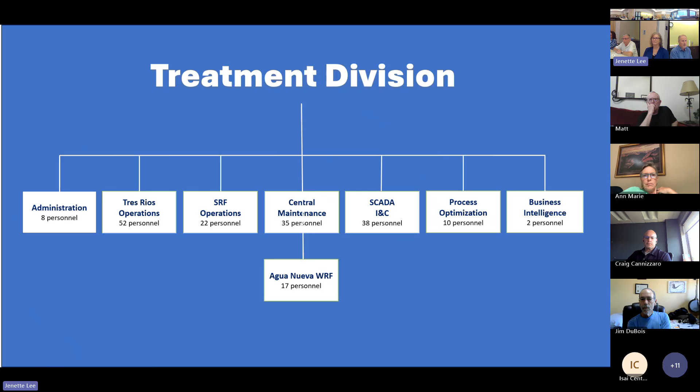And then Belinda runs our business intelligence team, and they try to make sense of all the data we have. What Belinda's been doing right now is gathering Power BI dashboards, bringing in financial aspects, our personnel aspects, laboratory data, just trying to make better dashboards and use our information. Then we have Agua Nueva next door, which is actually operated and maintained by Jacobs under contract. That's a 15-year contract. Next slide.

So when you think of wastewater treatment and resource recovery, we primarily make 3 main products. Reuse water that we put back into the environment, whether it's for habitat restoration or beneficial reuse for other applications. Our biosolids, the solids that we produce, go out for land application as a fertilizer amendment. And more recently, we've been making renewable natural gas since about 2021. Prior to that, we used all of our biogas for heating needs on site, or cogen in previous years when it was Ina Road, but now we're putting all of our gas into the natural gas pipeline.

Thanks. So projects that are underway at treatment division. This is our Avra Valley facility. Biggest improvements we have underway, and Jackson just mentioned it, we did a disinfection upgrade. The UV disinfection system, we replaced all of it. It had been installed probably 16 years ago. It did undergo some damage in a flood we had a few years back in a summertime event, and so we started having more malfunctions on that system. So we upgraded the disinfection system with more modern equipment just recently. I think they were finished probably about a month ago.

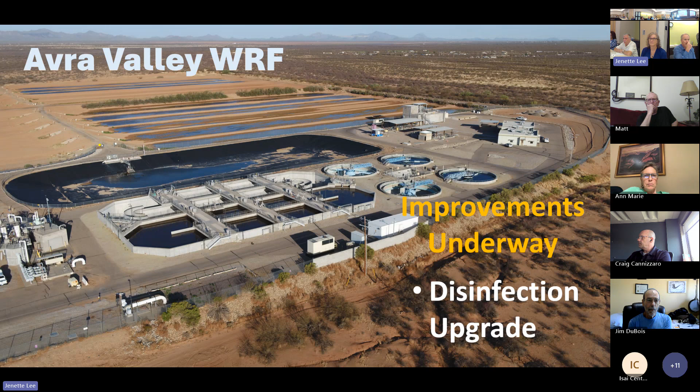Next slide. Yeah, and go back. Here's one important thing about Avra Valley. You'll see there's 3 bridges going across those 2 oxidation ditches. We have 6 rotors on each ditch here, so we can provide a lot of energy, a lot of aeration capacity. When I get to the Green Valley slide, you'll see it doesn't have that, in a project we have underway. Next slide.

Our Corona de Tucson project. This one's kind of interesting. So we've had this facility way out past the fairgrounds, Corona de Tucson. We have two reactors out there, one MGD total, so each of them's half an MGD. We've been running on one ever since it was installed.

Our flows increased to the point where we need to have both of them in service. So we just switched over, I think it was January of this year, we have both basins in service. And in doing so, we quickly realized we were lacking the aeration capacity to run two reliably. The header that supplies the air to both those reactors is compromised, just cathodic corrosion in the soil. We have leaks in that pipe, so we need to replace that.

We're running 5 of the 7 blowers, and so we need additional blower capacity. And the chlorine contact chamber we had out there was only rated for 500,000 gallons. And so we need to upgrade the disinfection to 1 MGD as well.

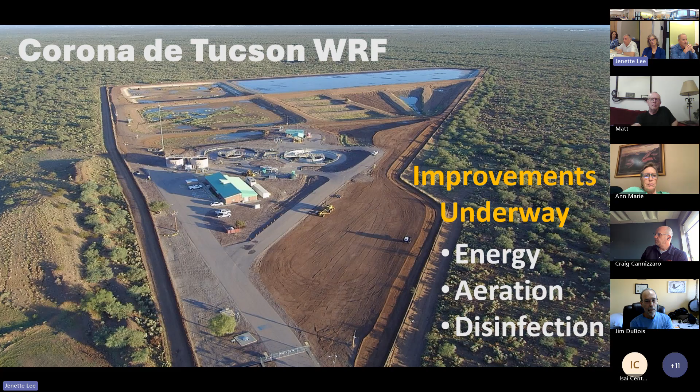Green Valley. Green Valley is kind of in a precarious situation because we're thinking of closing it and building that regional facility in Sahuarita. So what do you do in a facility like this? You don't want to invest a lot of money that's going to be abandoned in a few years, but it's a very nice facility that served us well. The difference you see in Green Valley, across that oxidation ditch on the left, you only see 2 bridges there. We only have 4 rotors there. So we're somewhat air limited.

This is a 2 MGD ditch, but we've gotten permit capacity that we can hydraulically treat 2.8 through that ditch. And we need a little bit of additional aeration. So our process optimization group and the operations team out of Green Valley have been working for the last 2 years where we would take flow from those 2 round aerated lagoons on the right and shunt that water back over to the ditch during low flow conditions, kind of shed flow, just like we would do a swing zone in a traditional BNR operation. And it's worked quite effectively.

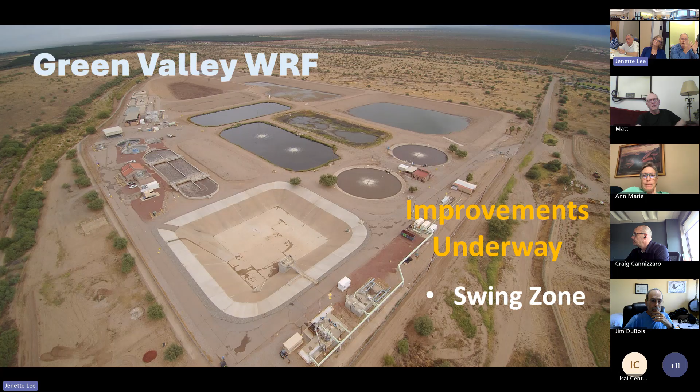Our big challenge right now is getting ADEQ to see it that way and not have to make major changes. What we'd like to do is be less dependent on the lagoon system, use those aerated lagoons as a pre-treatment to provide some energy and air, then move that water over to the ditch. We produce Class A plus effluent from the ditch. We'd like to maximize that, but we're going through ADEQ's red tape. Our goal would be to extend this facility to the 2030 time period until we can get this regional Sahuarita plant online. Next slide.

So Jackson mentioned it, but this is just a snapshot. Ideally, this is the location of what we call the Southwest Regional Facility right now.

We are searching for new names for the facility, but I'm afraid to do a competition because, remember that research vessel the Brits put out a few years ago? The number 1 internet vote was Boaty McBoatface. We don't want that, so we need to be careful how we name this facility.

But eventually it could receive flows from Arivaca, Green Valley, and the town of Sahuarita, all those regional facilities.

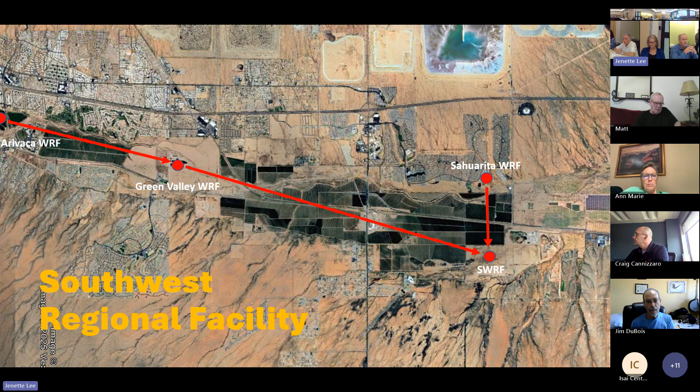It's a huge expense when we change out that carbon, and we're right adjacent to a sports park and right along I-10 and Ina Road. And so at our Agua Nueva facility next door here, we use a different media. It's a biofilter, BioRem, and it has an irrigation system. It keeps the media moist. As the air goes through it, the bacteria that grow in that biofilter consume sulfur. And so they knock down that H2S odor.

And so this is kind of a hybrid system. We like the performance of the one next door. It's performed very well for almost 12 years without any difficulty. So we installed the same thing here at Tres Rios. That'll lessen our dependence on carbon change out. It's going to improve the air quality. Our neighbors right next door, the sports park, they're right along the fence line, right at our headworks, the most odoriferous part of the plant, and we don't get complaints.

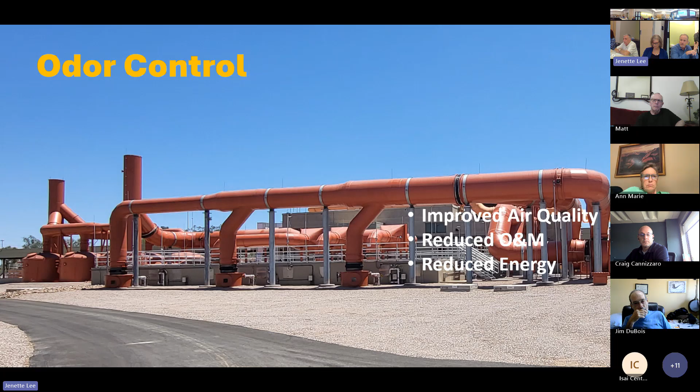And then we do still maintain a few carbon vessels on the back end just for polishing. And so this is a real nice addition that we put there, but it's going to save us O&M cost for media replacement and energy. Next slide.

Environmental stewardship. So this is the project that we've been working on, and some of you that have been on this committee for a while, you remember that we had the Anammox pilot project here for about 4 years in the back. Alejandra helped me construct it when she was an intern with me. We ran that for about 4 years. We're constructing a full-scale one at Tres Rios right now. And you'll see we're building columns within an existing tank. We repurposed an old clarifier at Tres Rios. We're building a tank inside there, and this will reduce the ammonia level in our side stream waste.

That side stream waste at Tres Rios, because we have regional solids handling, almost 40% of our daily ammonia load is from our own side stream recycle waste. And so this process right there will take that ammonia from like 1,200 parts per million down to less than 200 parts per million, using about 30% less aeration. And so the benefit of that is we'll be able to have fewer basins in service at Tres Rios, and we'll save at least 30% on our aeration demand, which is energy cost. And we'll get higher water quality.

One thing that we're challenged with at Tres Rios is we have an ammonia impact ratio in our permit, and that ammonia ratio is based on temperature and pH. Can't do much about the pH, but our temperatures are quite high, especially in summer. So at Tres Rios in the winter time, our ammonia discharge limit's probably around 4 parts per million. In the summertime, it's less than 1. So it gets very challenging in the summertime to meet that ammonia limit. So getting rid of that 40% of our ammonia load with this process will help us achieve higher quality water as well. Permit compliance. Next slide.

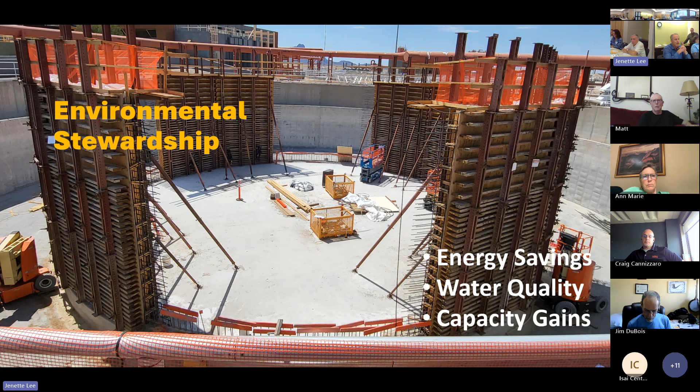So rehab. We have 6 digesters at Tres Rios right now. These 2 large ones right here were put in 2013. There's 4 that were installed back in the 80s. We're in the process of adding a 7th digester right now, and we're doing rehab on some of that original 4-pack right now. Digester 4, we just removed the cover on it last week, and we're doing a rehab on that. We'll get a new cover on there.

The covers also float, so that's where we store biogas before we take it to upgrading to RNG. One neat process that we're going to install there right now is an alkaline thermal hydrolysis process. And Steve and I went and toured one in Kenosha last year, I believe.

The benefit of this, you preheat the waste activated sludge before it goes in the digester, so it lyses the cells. So we get improved biogas production. It reduces the volume, so it reduces your sludge volume by about 50%. So by putting this process in, it's going to lessen our need to construct future digesters because we'll have more capacity, make better use of our existing capacity.

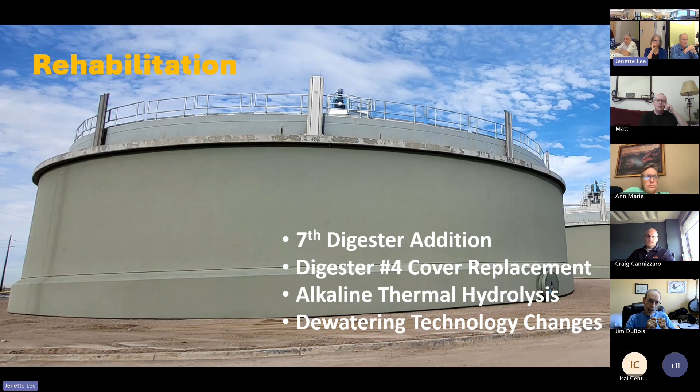We're also looking to change out from our centrifuges to screw presses, strictly because of the high dollar demand and high lead times to get our centrifuges repaired. Very expensive, very long lead times, and it's kind of become a bottleneck for us. And so we're putting in screw presses instead. Next slide.

We don't always have sunny days. Sometimes we have a bad day. We were in the process of doing some upgrades on our RNG process in late June. And so we were doing an inert gas purge, and you'll see this header right here that's broken in two. It ruptured in one of our digester control buildings. Luckily, it ruptured when we had inert gas nitrogen through there, not when we were flowing biogas. It could have been an explosive hazard.

But the most alarming aspect of this is this was engineered and designed and put in place in 2013. This component that failed right there has a PSI rating of 5 PSI. It was engineered and designed for a system that operates at 15 PSI. So it was a liability, a ticking time bomb waiting for an opportunity. Luckily for us, it happened during an inert gas purge. Nobody was injured. Damage was limited. This could have been catastrophic.

So we haven't brought our RNG process back up online. It'll be down for almost 3 months because we're doing a complete thorough safety review, process hazard analysis. Because that original 4-pack of digesters were installed in the 80s, a lot of these are over 40 years old now. So we're doing a really thorough review, making sure that stuff that was installed is appropriate for the current uses that we're doing today, and that there's no other hidden skeletons out there that aren't fit for purpose. So we're doing that to make sure all our assets and our employees are safe before we resume biogas production for RNG.

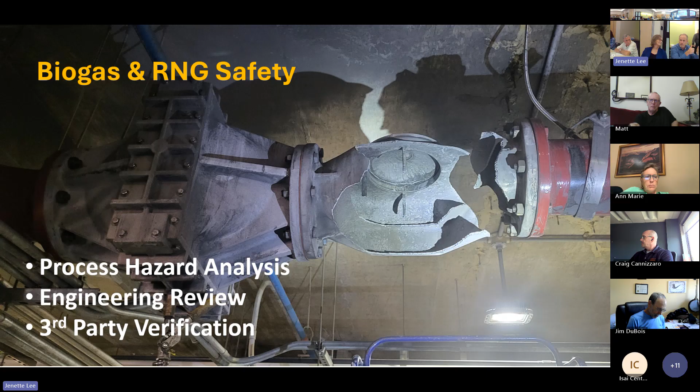And we're having M3 Engineering in town doing the third-party review, pressure testing all these systems, but we're doing a component review of all these things over the last 40 years, and Brown and Caldwell's helping us do that effort as well. So that'll be a future project, things that come out of this. We've prepared that already. We haven't brought the system back online yet, but we're gonna do it the right way and make sure that when we walk away, Jackson and I and Steve and everybody else, that for the next 40 years, people are assured that it's safe and it's not a liability for the department.

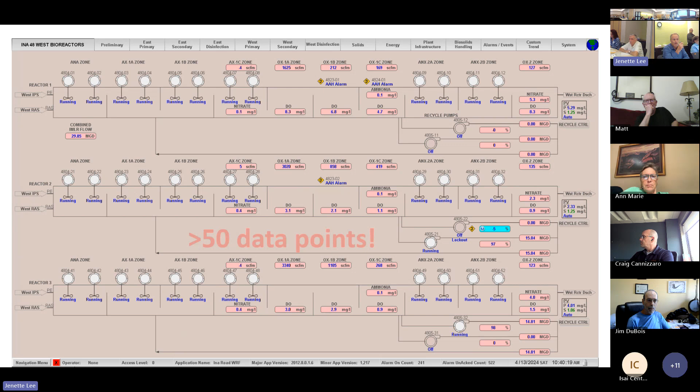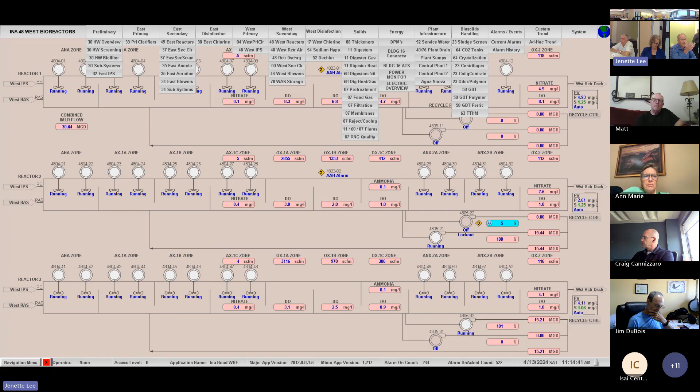Now that SCADA is reading everything, every few seconds you're getting a data point out of there. Combine that with our laboratory data, all the power meters and different things we have on site, all those sensors. We have thousands, hundreds of thousands of data points being generated every day. But it's useless information because nobody's got the time or ability to look through that data.

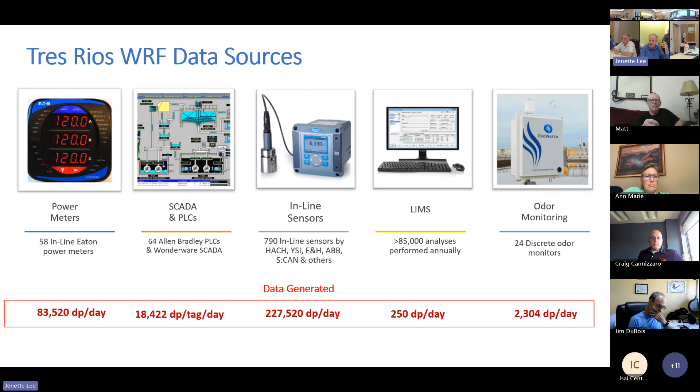So we're data rich, but we're information poor, right? And so this is what we feel like sometimes. You have all this information coming at you, but you really can't use it effectively. So what our solution is, we've all seen AI, ChatGPT, and how it's being used in different fields. We partnered with Palantir. They're the largest AI firm in the world.

They mostly do government contracting and military work and banking systems, but they have a product called Foundry, and it's used in manufacturing, whether you're Caterpillar, John Deere, Ford. It's used on assembly lines, stuff like that. And so they've adapted it for the factory. We're a water factory, right? And so we're adapting it for our use, and it consumes data, all those hundreds of thousands of data points, and it makes recommendations. And so Belinda's leading this project for us right now.

We've had it in operation at Agua Nueva for about 3 years now on the energy side. In Delaware, we've been using it for disinfection. And then in Puerto Rico, they've been using it for preventative maintenance. And so the packages that we have here that we're implementing, we did a blue ribbon panel last year with firms from WSSC Water in Maryland, Denver Water, Raleigh Water, and ourselves. And we went through 2 days looking at what's the best implementation for Tres Rios.

And so we'll be implementing it for polymer chemical savings, disinfection savings and improvements, and energy savings. And Belinda will be leading that project with us right now, and we're just kicking it off this month. Next slide.

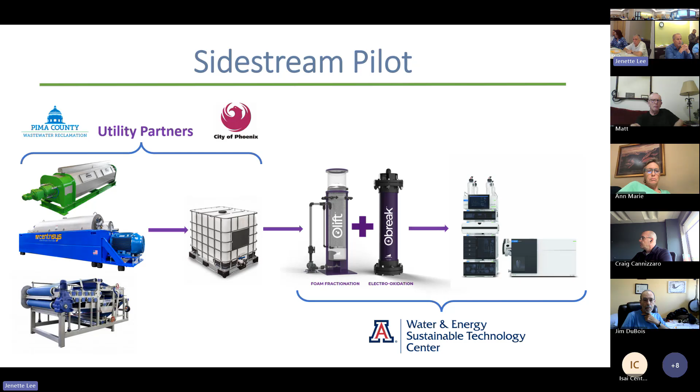And so they've done some work for brine reject using this foam fractionation, and it looks very effective. So it's another opportunity for us. Next slide. And that's it. Is that exciting? Yeah. Okay. Yeah. Thanks.

What is the actual term for this foam side stream? Has it got a name? Foam fractionation. Foam fractionation. Okay. So you're taking the PFAS out of the liquid fraction into the foam fraction. And then you've got a ton of foam, you pull a little vacuum on it, the foam collapses. Then you can either evaporate it and dry it, dispose of it as very small solid waste, it's concentrated. A lot smaller volume.

If I were to tell somebody about this, what would I call it? We're air stripping PFAS. Air stripping into foam and then fractionating it into the foam and then reducing the foam into the solid. Yeah, so when you're doing drinking water, if you're doing regular well water, it's not gonna foam very well, right? So you have to add a surfactant to it.

And so the longer the PFAS molecule chain is, it's more hydrophobic, right? So it jumps into the foam really easy. You get 96%, 98% extraction efficiency. The shorter chain molecules, they're more hydrophilic. They want to be in water more. But the PFAS molecule's got that little polar head on it, right? And so we're adding cationic surfactants that will attach to that little head and help strip it out of solution as well.

The polymer that we use for dewatered biosolids is a cationic polymer. And it foams whether we want it to or not. So it's kind of a perfect marriage of this stuff. And we met them last year at WEFTEC and we said, have you thought about using this in wastewater? He said, oh, it would never work in wastewater. We'd have to have such a huge system to treat 50 million gallons. I said, oh no, I'm thinking more of the side stream wastewater, it's a concentrated stream. And they said, you're on to something, how can we partner? So they gave us these systems and they just arrived here.

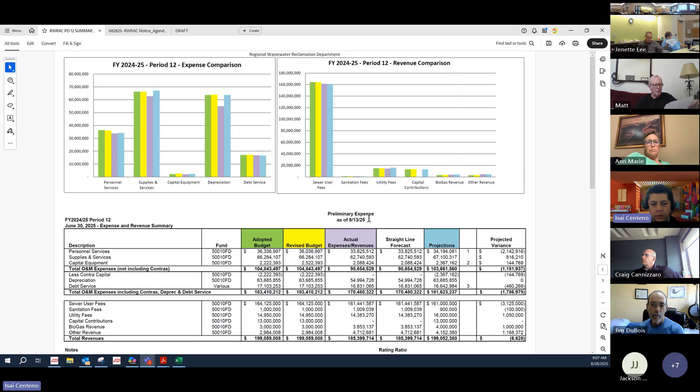So first and foremost, I want to bring the attention to this is a preliminary expense as of 8/13/25. We have to pretty much pick a date to cut off because data keeps coming in because people are working on accruals. So these actual expenses and revenues were changing every day. So we pick the date and hopefully next time we meet, I'll get you more up-to-date information. So as of 8/13/25, this is the data.

Adopted budget is still $104.8 million. Our projection as of period 10 is still 103.66, giving us a projection variance of 1.1, and the actuals at that date are $98.6 million. Scrolling down here to the total O&M expenses, including the contras, depreciation, debt services, our budget 183.4, actuals at 170.4 at that point, and projection of 181.6.

As you can see, our last capital contract has not been processed yet, so there's a lot of things still kind of missing in this process. So that gives us a variance of $1.7 million. Scrolling down to the total revenue, $199 million. Our actuals 185.3, and our projection is 199, giving us a variance of about $6,000.

As well, we can see that the capital contribution is still in process. So with that information still missing, we're still projecting that we're going to be coming under budget. And overall, Wastewater has done a great job using the revenue and total expenses to accomplish all the tasks that it has accomplished. I believe Mr. Matt has his hand up. Matt? Yeah, thanks, Isai. Sure thing.

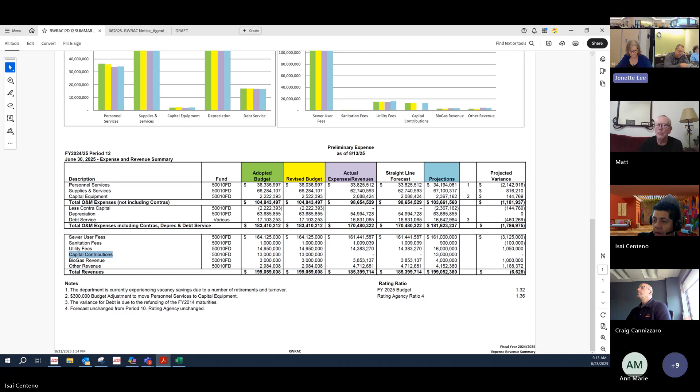Thanks, everyone. We'll move on to item 4, which is the financial subcommittee report. Kirsten? The subcommittee did not meet. Did not meet. We'll take nominations for when we should meet. It's not on the calendar. I believe a Doodle is gonna be sent out in September with proposed dates. Proposed topics too. We had some from last year that we were gonna cover in the fall. Okay. Perfect. Excellent. All right. Thank you very much.

And then the CIP subcommittee report, Asia. I saw you on there. Yes. Oh, hey, good morning, everyone. I apologize. I thought I had my notes here with me from our last CIP meeting, but I do not. Jeanette, can you help me out with the date that we met? July 14. Yes, okay, thank you. We met July 14th and we discussed the longer range, longer term CIP projects, some of the things that Jackson actually talked about. I'm just still flipping through.